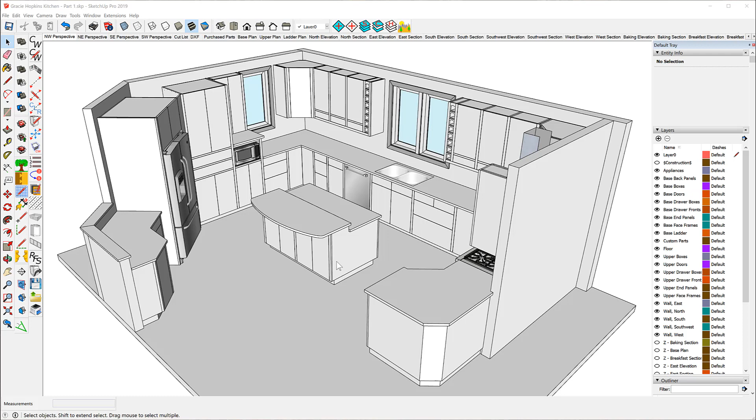Today we're going to begin drawing the model in front of you. We're going to do two things: first, draw the walls, and secondly, draw one 3-box cabinet. That's our total goal for today, and we're going to take it slow. I want to explain the details of how to draw walls and the details of the story stick in particular. Once we have that down, in Part 3 we can move along pretty quickly.

With that in mind, I've taken the time offline to create a layout of the walls. Here it is—this is all of the dimensions for the wall that we will need. Typically what you'll do is go to a client's house, and if it's a kitchen or closet or entertainment center, you're concerned with the inside dimensions of the wall and any obstructions. If it's a kitchen with plumbing obstructions, make sure you note where those are, and we'll include those in the drawing—any windows, doors, or other obstructions.

What we need to do is include the trim in that obstruction. Now, you don't have to actually draw the windows like I've done here—you could put a rectangle and punch it through. Just make sure if you take that shortcut, the rectangle you produce includes the outside edges of the trim.

If you're only doing one room, the thickness of the walls isn't a big issue. But if you're doing more than one room and some of the other rooms are on the other side of the walls, then you want to get the wall thickness correct. So those are details you have to pay attention to. Other than that, what we want is the obstructions and all the dimensions that will allow us to lay out cabinets offline, away from the client's house.

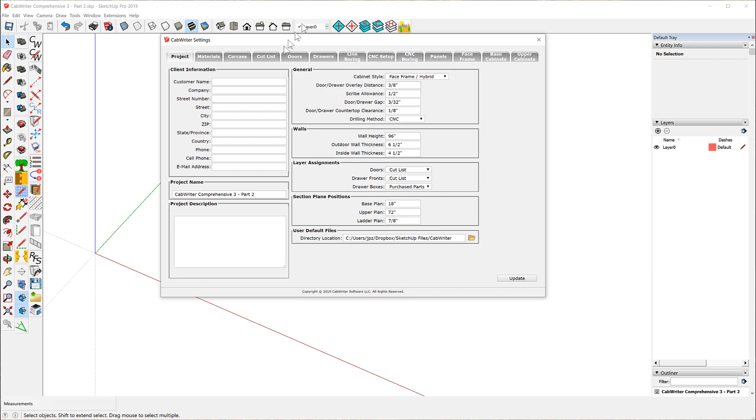So now that it's saved, I need to do the second part to create a CabWriter project, and that's to use this tool right here. I'll use this tool once and only once per project. What it does is immediately open the CabWriter settings dialog box.

Normally what you would do is go through each one of these tabs—there are 13 of them—and make any changes you wanted to reflect the design style you're going to use for your cabinets. You may actually have to do this a number of times in a project, and we will do it a number of times in this project. But to save time, I've actually saved them in files, and I'll show you that.

If I go to Open and Load CabWriter defaults, this dialog box comes up. And if I look at this drop-down menu, you notice there's a bunch of defaults that come with CabWriter for imperial units, and the same styles that come in metric units.

You'll probably see nothing down here when you first install CabWriter, but as you use CabWriter and save defaults, this is where they'll go, and this list will grow, as mine has. These will be defaults you save for various types of cabinet styles you're working on.

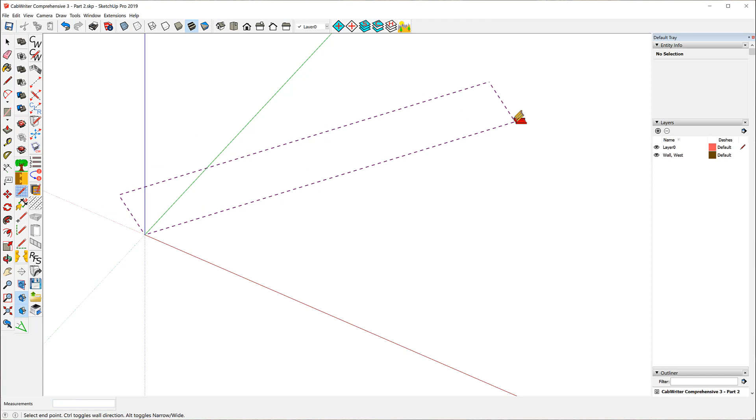All right, the first thing we see is we have a dotted box. That dotted box is telling me that's an illegal wall. It is a hard and fast rule that your entire model in CabWriter must be in this positive, positive, positive quadrant — positive red, positive green, positive blue. If any part of it, no matter how small, is outside of that positive, positive, positive quadrant, you will get this dotted box, which is telling you that's an illegal wall.

So to fix this, I can hit the Control key. Notice as I move this icon and keep tapping the Control key, I switch the side of the line that the wall is drawn on. So now that I've got it in the positive, positive, positive quadrant, it turns green.

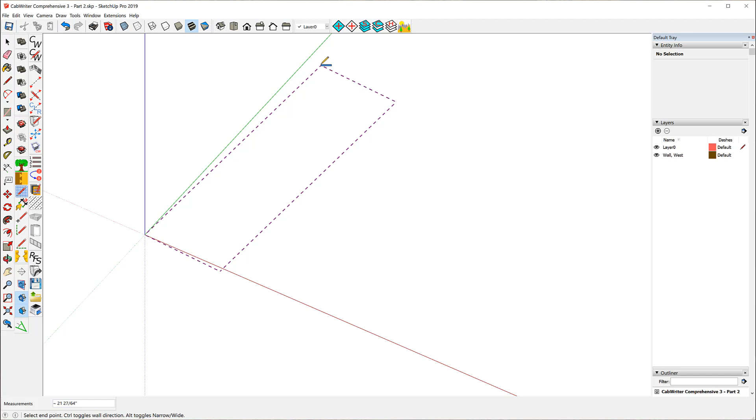Now notice if I start to tip it like this, there's a very small part down there in the lower right corner that is outside of that quadrant, and so the box turns to a dashed box. Same is true here — if I put any part of it outside that area into the negative red area, I'll get a dashed box telling me that's not legal.

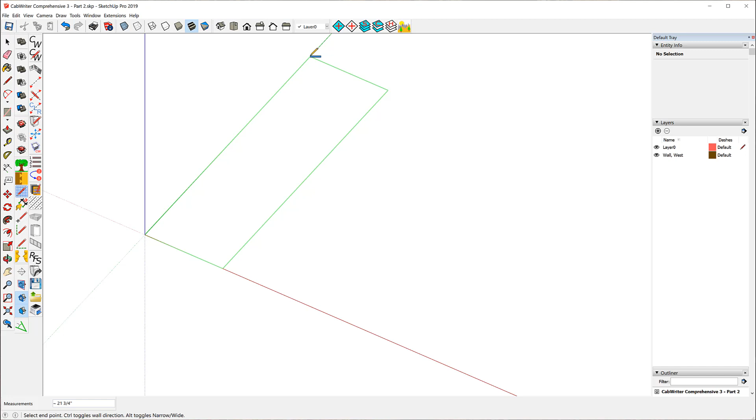All right, so what I want is a wall along the green axis, and I want it to be 192 inches long, which is 16 feet. So I'll type 192. And there's my first wall.

Okay, now remember, I only supplied the name West for that wall. Let's see what happened. Notice it's on a layer called 'Wall, West.' So what happens is we give the wall a name — it could have been a number, could have been 'sink wall,' in which case I'd just call it sink, or 'refrigerator' or something like that.

It will take that name and prepend 'wall space' to it, and that's the layer the wall goes on. The next thing it did is name both the instance and definition name the same, this time prepending it with capital C, capital W, underscore, capital WALL, space — so that's the prefix, CW WALL, and whatever name I gave it. That's the instance and definition name.

Remember that naming nomenclature. The purpose for that, by the way, is so that as I add more walls, all of the wall layers will be together because of the wall space, and when you alphabetize this list, they'll all be together. The purpose of the CW_wall prefix is so that CabWriter can recognize it as a CabWriter component.

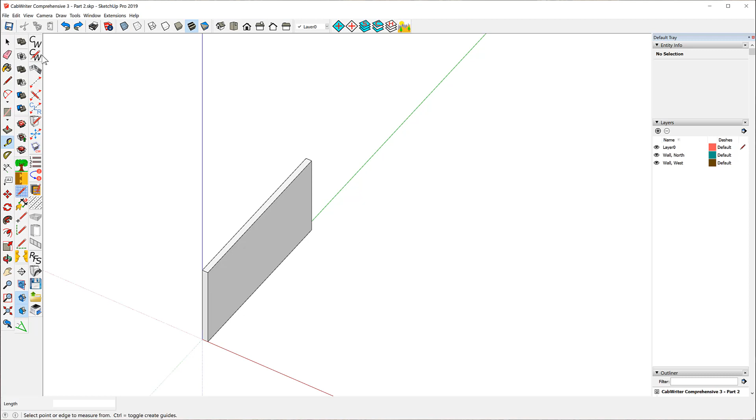96 inches. Those dimensions come from this area on the project tab called the Walls section. The wall height is 96, an outside wall is 6.5, and an inside wall is 4.5. Depending on your construction, you can change these to anything you want.

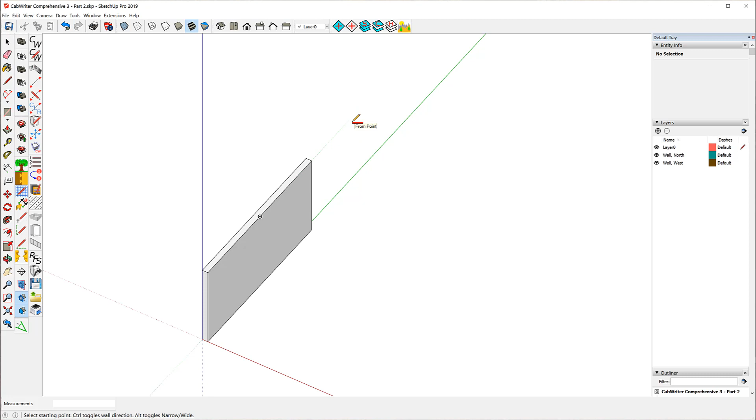But first I have to select the wall tool and click on my first point. Now notice the cursor is a pencil, and in this case it's got a red bar under it. The red bar means hot, meaning an inside wall. But if I tap the Alt key, it changes to blue, which means cold, or outside wall. And that's what I want.

So now I have to find my first point. It's actually going to be in here someplace, and I can't see it, and I'm not lucky enough to click on it. So I could do one of two things. The most difficult is to choose X-ray, find the point, and click on it. The easiest is, instead of clicking on this point, click on this point. It's the same point, only 96 inches up along the blue axis. If I click on that, I'll get the 'provide a wall name' dialog box.

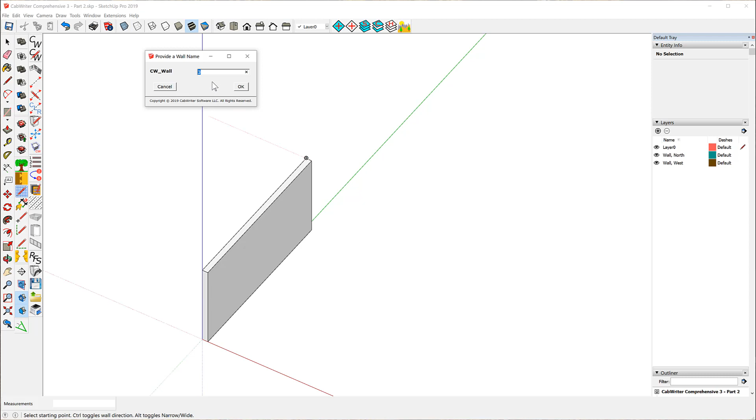I'll name it the north wall and say OK. Now notice as I drag it out parallel to the red axis, I get a wall outlined on the floor, even though I clicked on this point right here. Notice, if I tilt this down, it's no longer red because it's not parallel to the red axis, but it is orange. That's a legal wall right there.

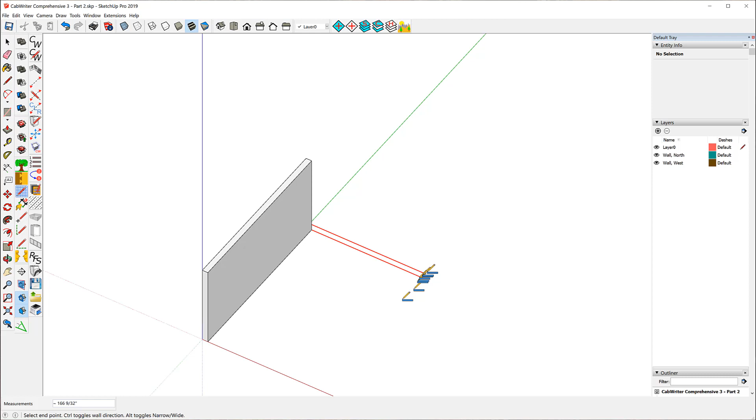As is that. But if I go back a tiny bit, it's not, because that upper left corner would be outside the positive area. So this lets me know I'm on the red axis. I'm going to type 240, enter, and there's my second wall.

Now my third wall is going to be my east wall, and it wants to be 223 inches from the inside of this wall — the inside of the east wall wants to be 223 inches from the inside of the west wall. The easiest way to do that is to temporarily give myself a construction line, 223 inches long. And I hope I did that right. I did.

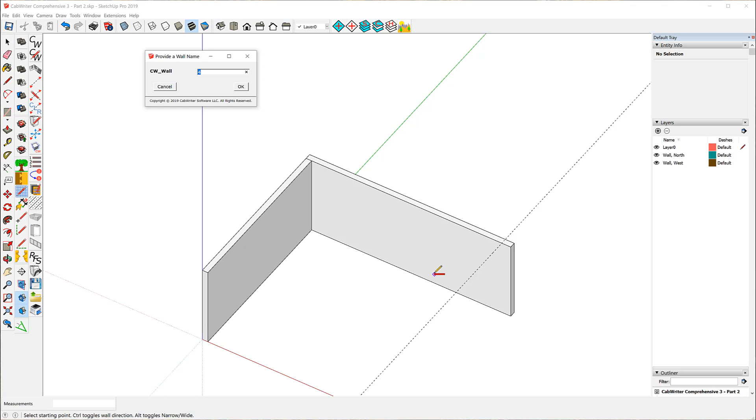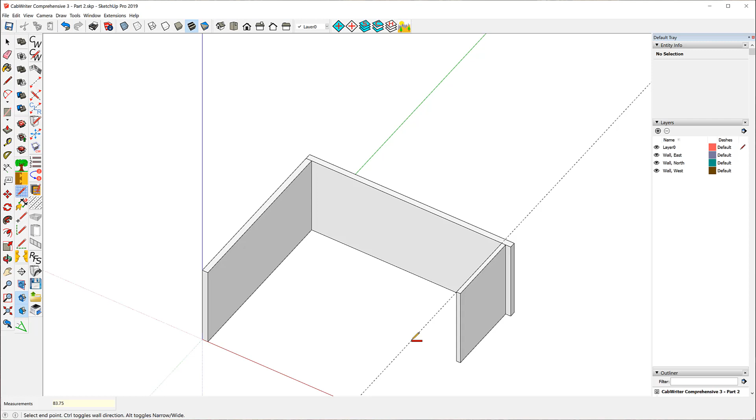This time along the green, and the east wall wants to be 83 3/4 inches. But before I draw the south wall, let me get rid of this construction line. And look over here what I've got now.

I've got 3 of the walls up, and they're called wall east, wall north, wall west. And as I promised, they are all grouped together. Keep your eye on that as we go through this model — that will be very handy.

All right, now the next couple of walls are going to require some construction lines and a little construction work. But let's just start by drawing the south wall. The south wall is going to be an inside wall, and that's what we've got right now. It's going to start at the origin, and it's going to come out 102 3/8 inches. So I'll start here, and that's going to be the south wall.

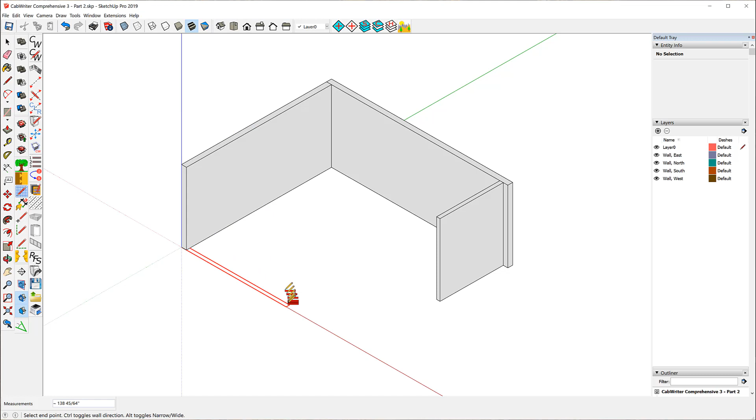And it'll come out 102 3/8 inches. Now I'm not too worried that it's overlapping because this is going to get cut off. You'll see that in a moment.

I'm going to create another construction line, actually a construction point, and it's going to start from this point and go along the red axis in this direction, 36 inches. And that's going to be an intersection point for the southwest wall.

And the southwest wall is going to be built at a 45-degree angle, so I'm going to add that. I'll hold the shift key down to lock in my protractor tool. I'll come out here and then around 45.

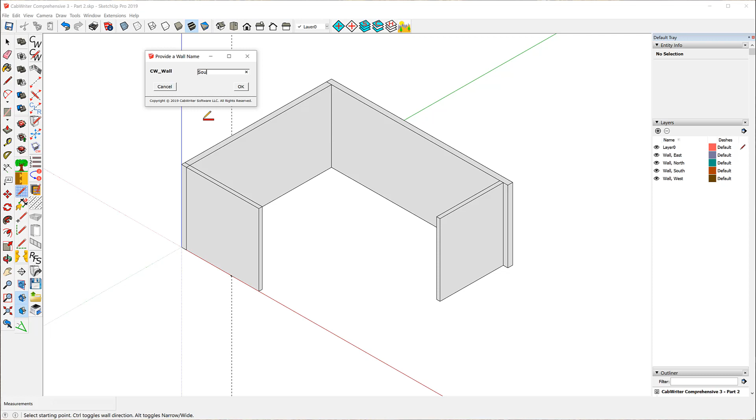And now I'm going to use the wall tool again. This time it's also going to be an inside wall, and I'm going to start here. And this is going to be southwest. It's going to be my southwest wall. And it's going to also intersect here.

I can come out along this line. Any place on that construction line is fine. Notice that that is an illegal wall. Now, CabWriter doesn't stop you from drawing illegal walls, it just lets you know that you are doing so. So I can click here, and I have this very long wall, but not to worry. I'm going to fix that.

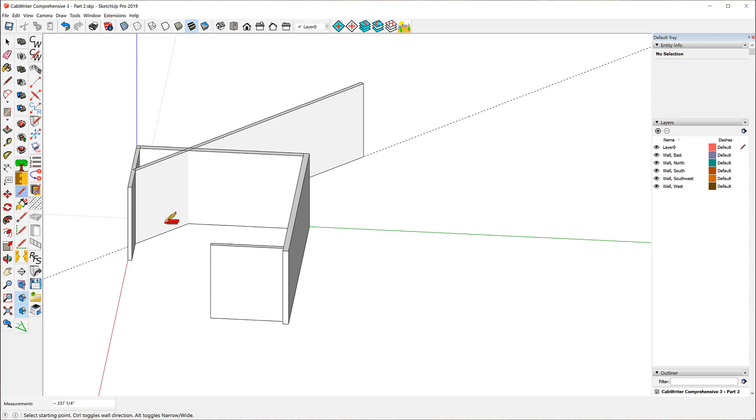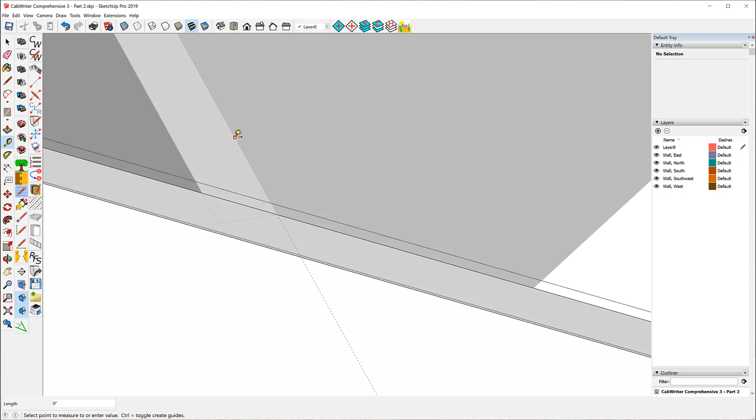So what I want to do is choose this wall, edit component, and create for myself a construction line parallel to that wall. And now I'll draw a line from that intersection to that intersection. And with the push-pull tool, I'll get rid of this part of the wall.

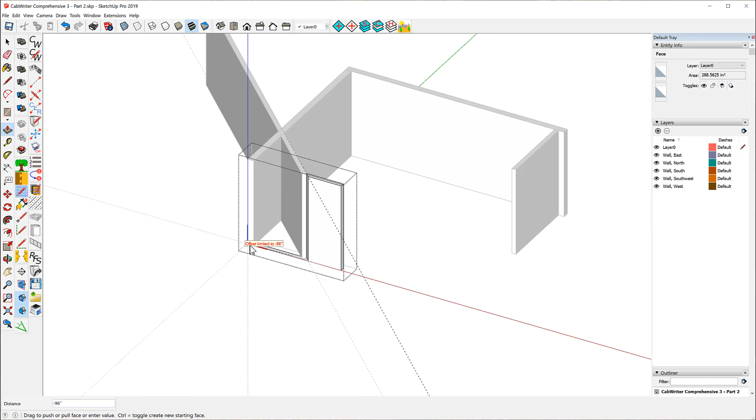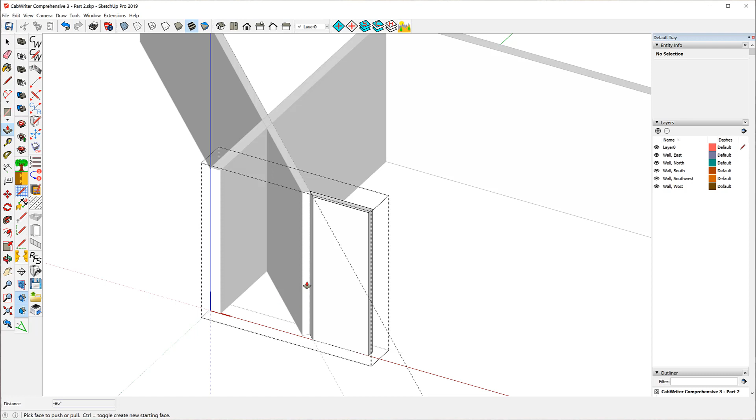Now notice right away that my axis for this part is over here by the origin. I want to move it over here. So the way I'll do that is, first of all, get rid of this construction line that I created, then leave Edit Component mode.

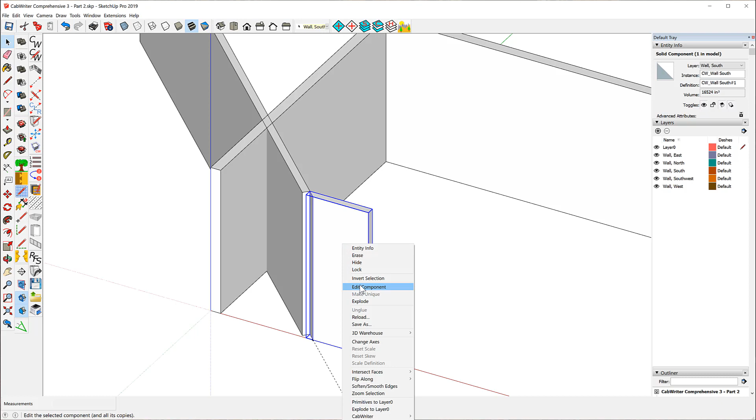Choose this wall and say Change Axes. And I'll click on that point, come out along the red, then I'll go back along the green. And there we go, now I've got the correct bounding box. And if I go to Edit Component, notice my axis is here, not over here. All right, so that one's fixed up.

Now the other thing I want to do is fix this one. Notice already it's got a really bad bounding box, but I'll fix that in a while. Let's edit this component. And if I'm not mistaken, well, let's do this.

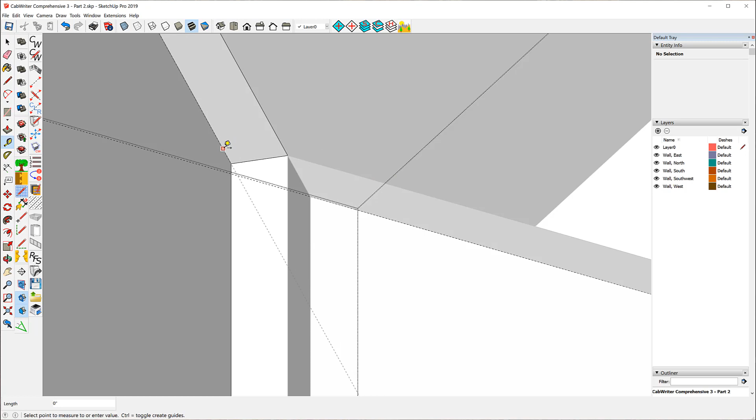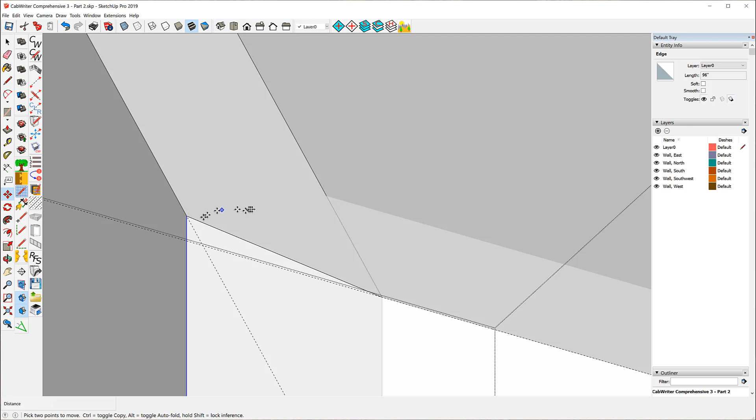So what I want to do is take this line on this part, oh, I guess I have it. I've got it selected. I'm going to move it from here to here. And I'm going to take this line and move it from here to here.

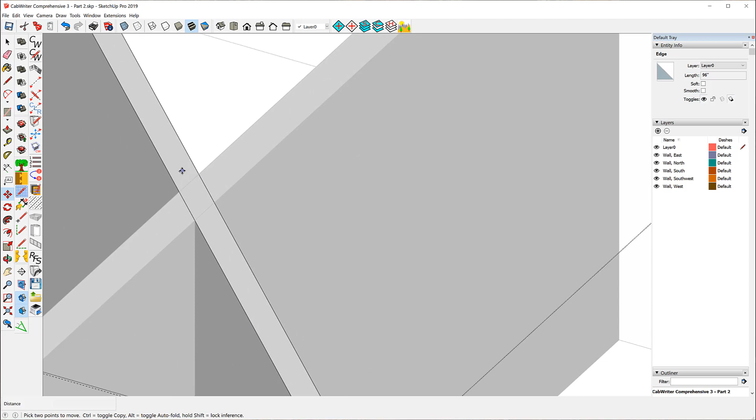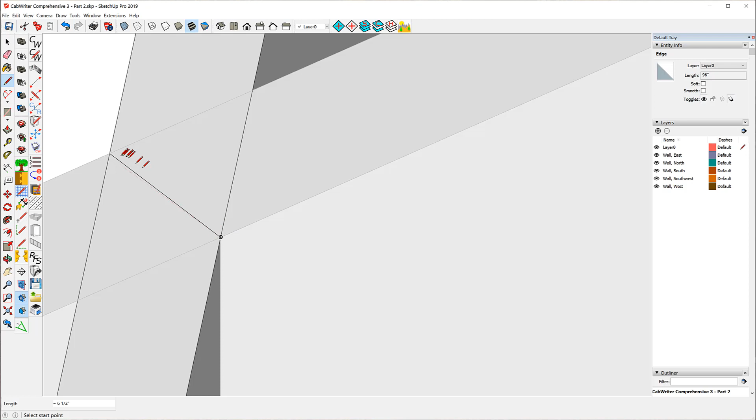And while I'm at it, I'm going to draw a line from here to here. Now, by the way, that line is at an angle, it's not parallel to the red axis. Notice, well, it's not going to let me. Oh, there we go. Notice that's parallel to the red axis, but that's not where they intersect.

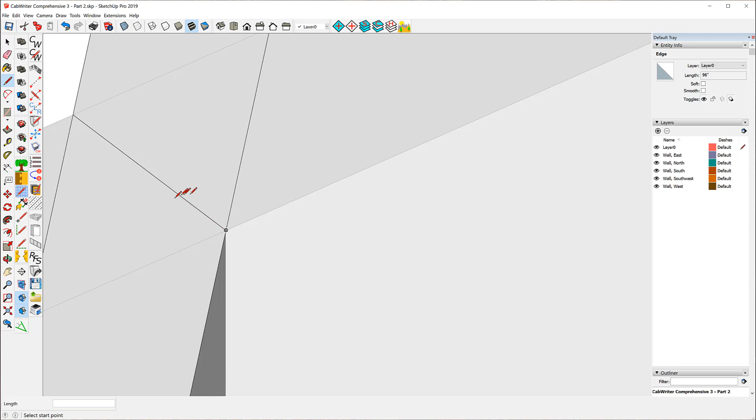They intersect there, not there. So that's not exactly parallel to the red axis, which means that's not a 90-degree angle here. But we'll leave that up to the carpenters to figure out.

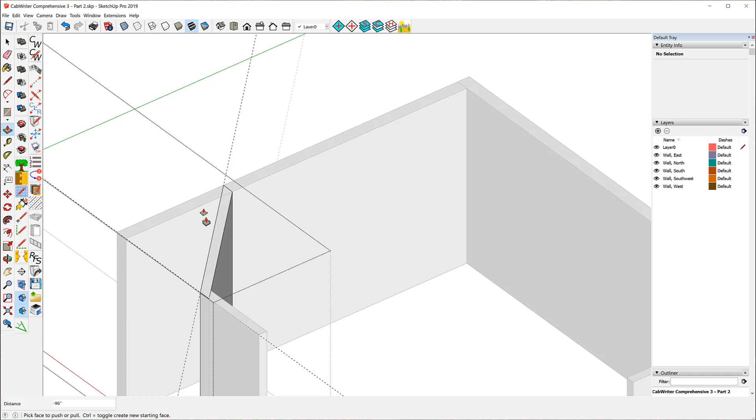Now what I can do, and by the way, the reason that's not at 90 degrees is because this is a 6.5-inch wall and this is a 4.5-inch wall, and that gives me a strange angle here. But that's okay. All right, now I've got to bring the axis in, and I've also got to correct for the bounding box. So let me do that in one fell swoop.

Let me get rid of my construction lines. Since I created those while I was in Edit Component mode, I've got to delete them before I leave Edit Component mode.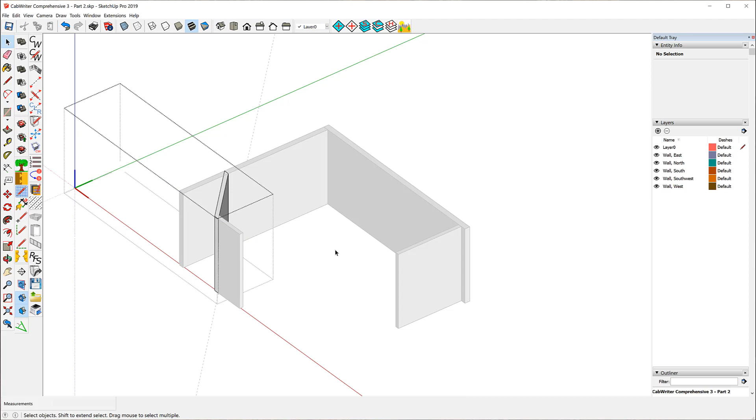I'm going to change axis. And what I typically do is I take the longest dimension and make that the red, and then make the other dimension. Whoops, what did we do wrong here? Let me undo that. Let's do that again.

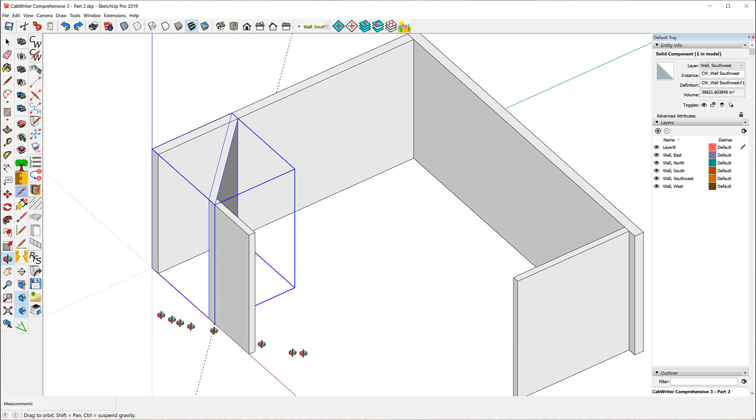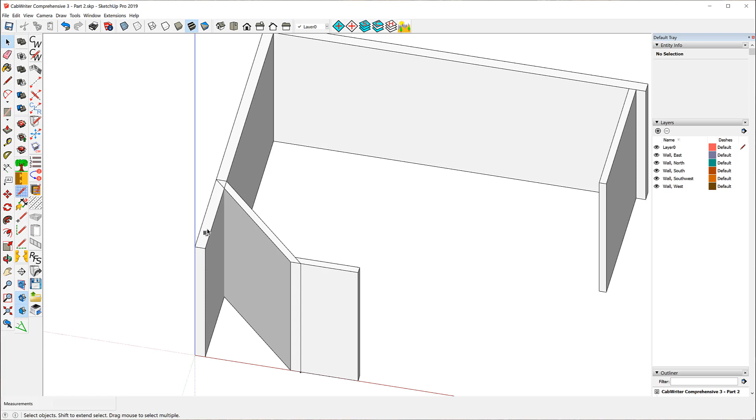That's better. All right, now one last thing we have to do is fix up this wall, and I'll get rid of this construction line. I'm going to do that by recreating this line again here, and again notice it's not along the red axis, it's down here a ways.

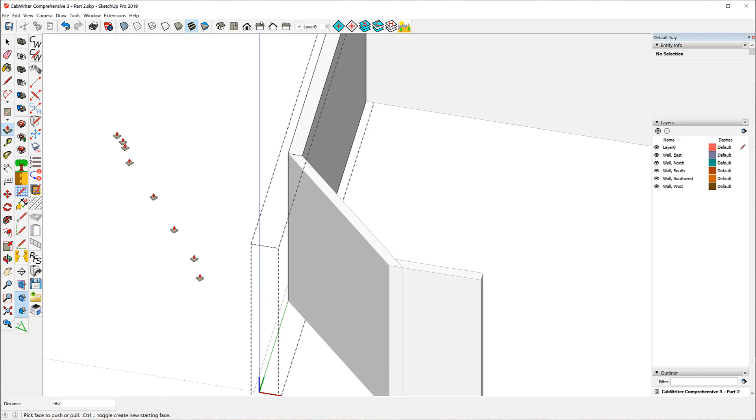And again, I got to fix up the axis. This one will be fairly easy. And there we go. All right, now I have my walls. I don't have my construction or my obstructions. What I'm going to do is bring in one window here and show you how I would do that.

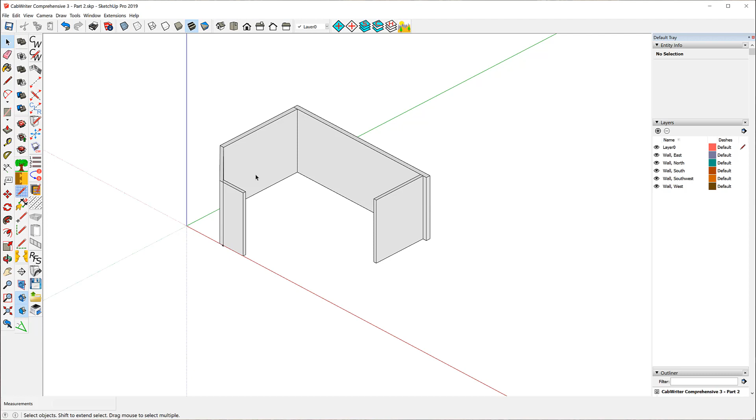I'm going to let you do the rest. So let me bring in the wall layout so we can see what we're trying to do.

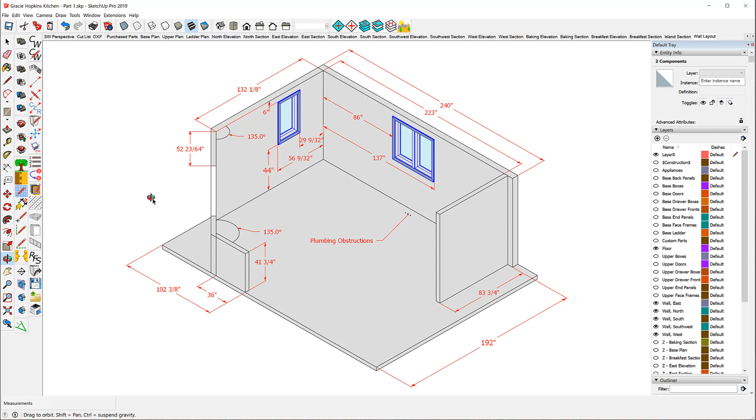Okay, now since I am drawing exactly the same model that I've already drawn here, what I can do is just simply select these two windows. And I will edit using the edit menu, not right click, copy, or Control C, but I'm going to use the edit menu and say copy. And also, by the way, notice in this image that these have to be cut down here to 41 3/4 inches, so I'll do that in a moment.

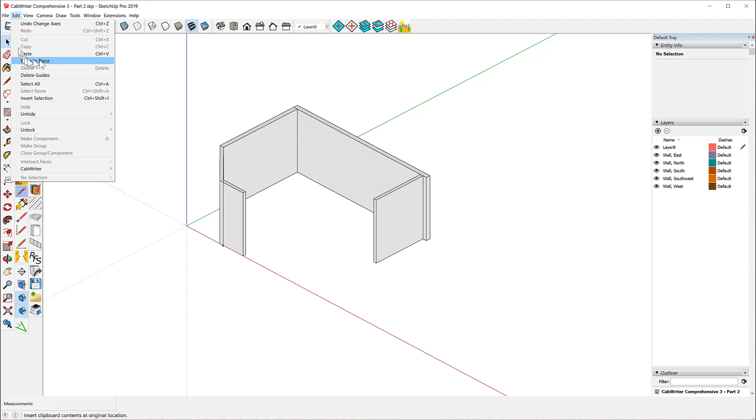All right, so I've copied these. I can simply go to my other model now and go to Edit, Paste in Place. Notice that the windows were put in here in exactly the same place because I used the Paste in Place as they were in the other model. And if I've drawn this model correctly, they'll be in the same place, which we'll check in a moment.

One of the things I have to do is cut these walls down, so let me do that. All right, so what I'm going to do is make a mark that's 41 3/4 up from the floor, up along the blue axis.

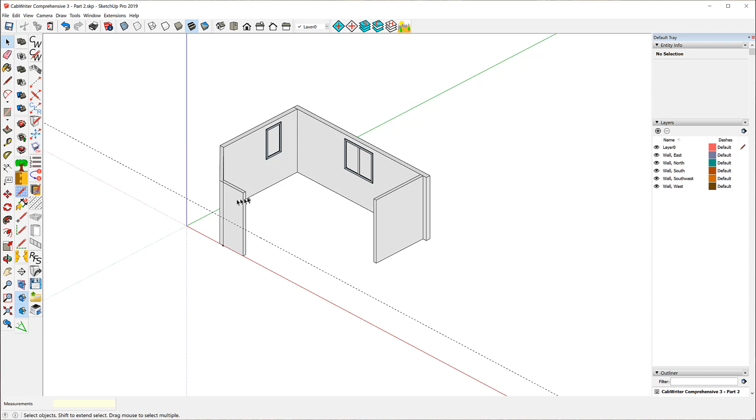And now I'm going to edit this wall. And with the push-pull tool, I'll bring it down to 41 3/4. Now I can get rid of that construction line.

Now, in order to bring this one down, what I've got to do is figure out where I want to bring it down. So I have a dimension that I got to come out 52 23/64. This is kind of a weird dimension, but it's a consequence of these two walls being different thicknesses. But I'll come out here 52 23/64, right there.

And so let me edit this wall. There's the guide point. There's the end, and that's 90. So I'll draw a line like this.

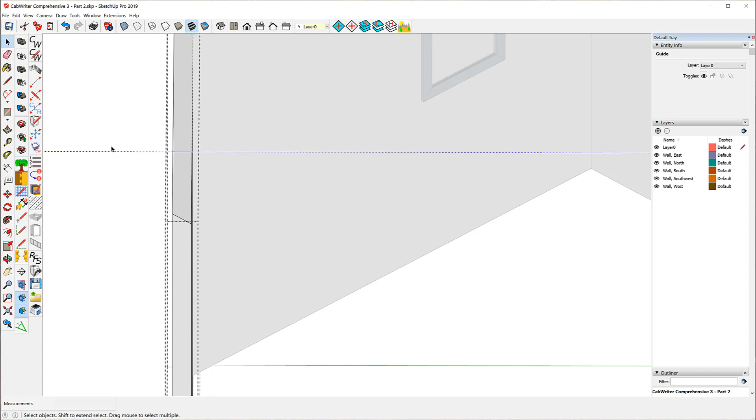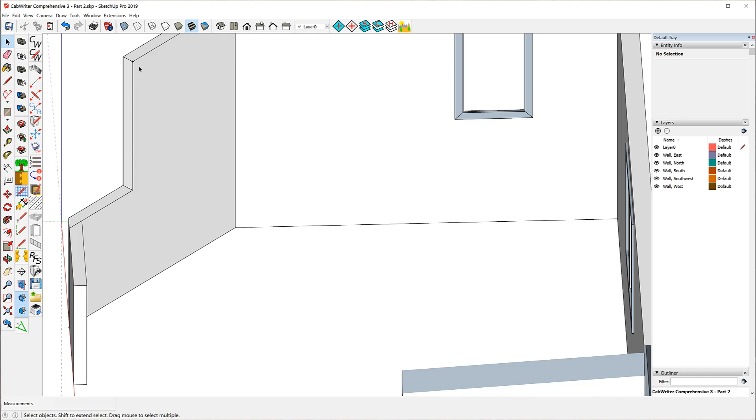I'm going to get rid of my construction line. And there we go, now I've got what I want. Let me get rid of this while I'm at it. Well, it doesn't want to. There we go. And while I'm at it, I've got one over here too to get rid of.

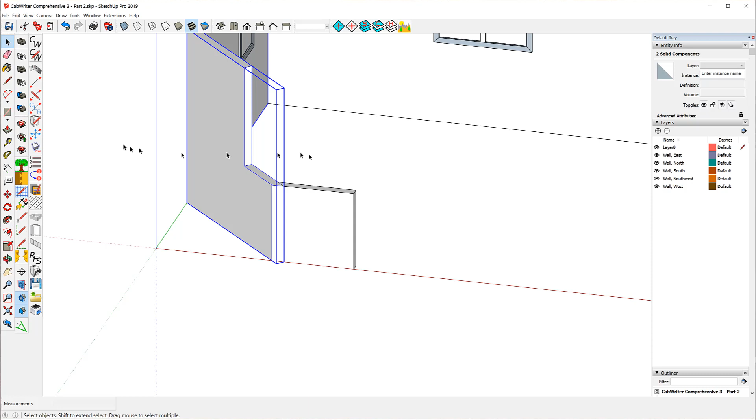All right, so I've got that done. And that all looks correct.

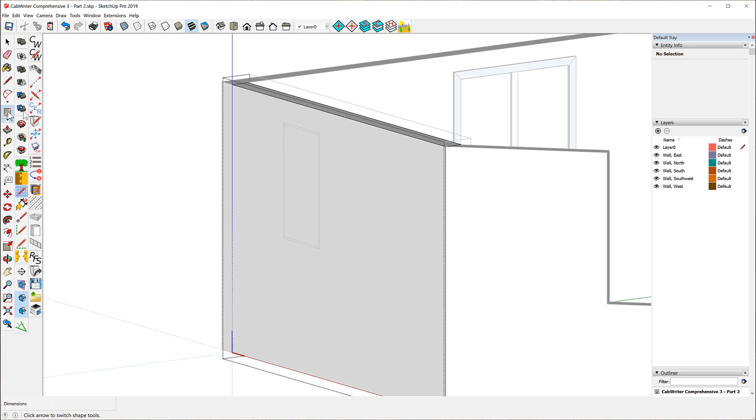Now what I can do to fix up these windows is I can go around back here. Select this, edit, and I can use the rectangle tool. Start there, come through there. Push this all the way through the other side. There we go, now I have my window.

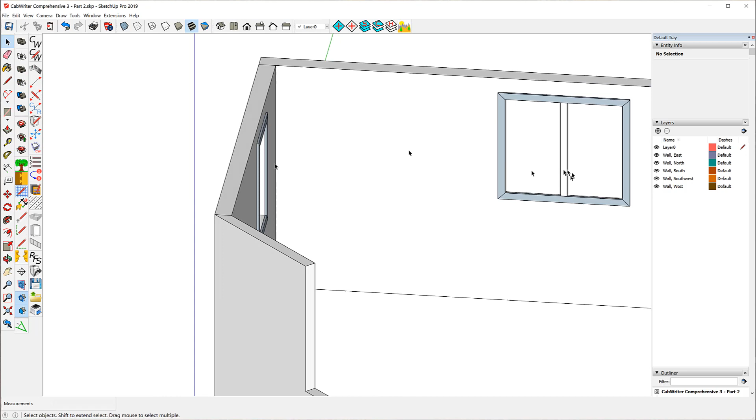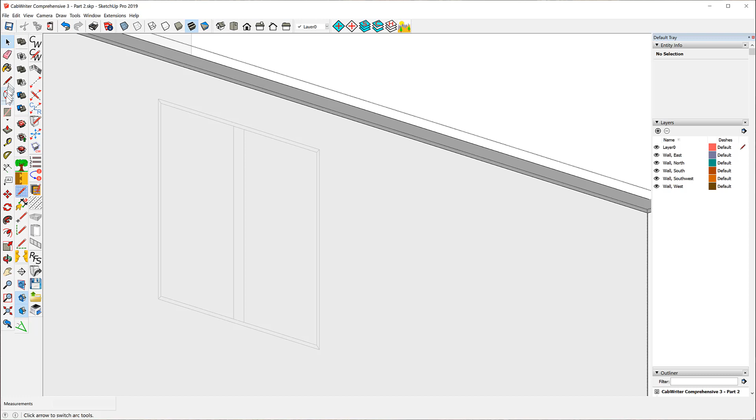I'll do the same thing to this other one. Whoops, I wasn't in edit component mode. And there we go, now I have my walls.

And at this point, I'm ready to do my first cabinet. Now, I don't have a floor here. I can add that anytime. I'll add it right now.

What I'm going to do, I'm going to start at the origin, go to this back corner. I'm going to pull this down a couple of inches. Make sure you pull it down and not up, I'll just say 2 inches. And just for the heck of it, I'll pull this end piece out a little. That's not what I wanted.

Doesn't matter how far. And there we go, now I got to make that a component, and I'll just call it floor. And I'll give it the same instance name as the component name.

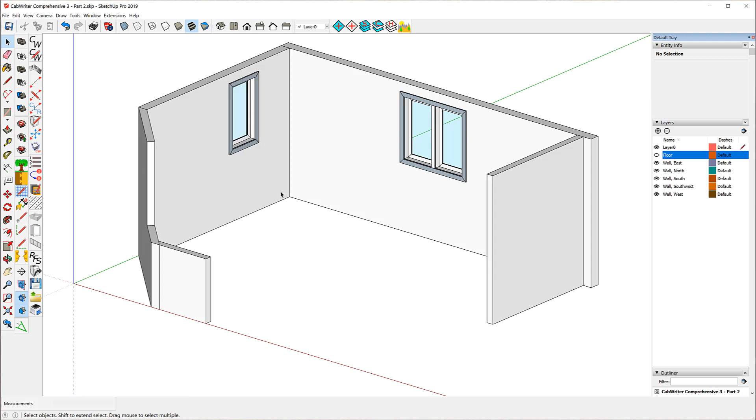Okay, so now my next part is to draw the cabinet I want to draw. And the way I start out is with construction lines. You must have construction lines for drawing cabinets, or at least construction points, but I like to draw construction lines.

The first one I'm going to draw starts at the base of this wall, coming out along the red axis 24 inches, which is the depth of my base cabinets. I'll do the same here, 24 inches, this time along the green axis. This is where my cabinets come together in the corner. I could draw construction lines on this wall and this wall too, but that would clutter things up at the moment, so let me just stick with this for now.

So the next thing I want to do is use the story stick tool to draw my cabinet. As I said, this is going to be a 3-box cabinet. Here in the corner is going to be a Lazy Susan. Next to it is going to be a 3-drawer bank. Next to that is going to be a standard base with a drawer, and then there's going to be an opening for a dishwasher. The total length of my cabinet is 45 inches.

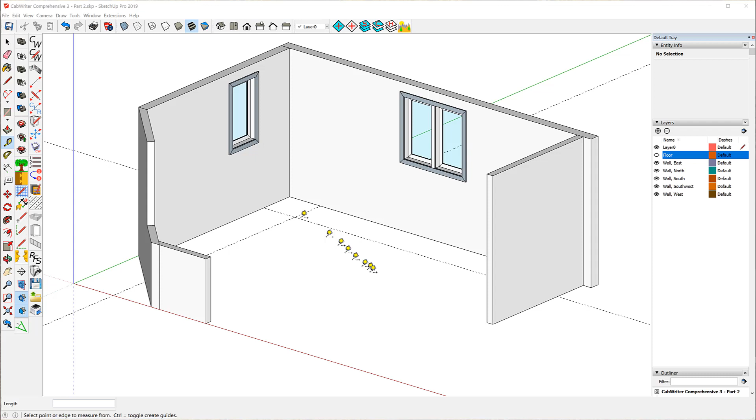I have to use the story stick to lay out where the cabinet begins. I'll start it here, and where it ends, over here someplace. Once I've done that, I can use the story stick to define the openings. There'll be 2 openings, and between them will be a connector stile, so there'll be a connector stile here and here.

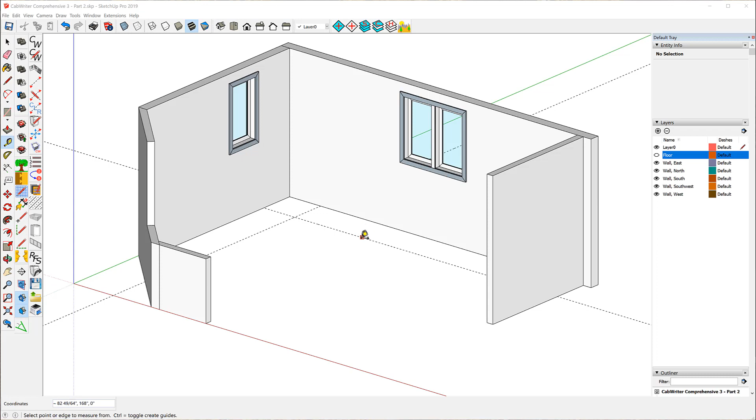You'll see this as I go along. Only the first 2 markers—that's what they're called, markers—the one on this end and the one down here, 45 inches, will require my defining what those stiles are. Every other stile in a cabinet will be a connector stile, so I don't have to tell CabWriter that they're going to be a connector stile.

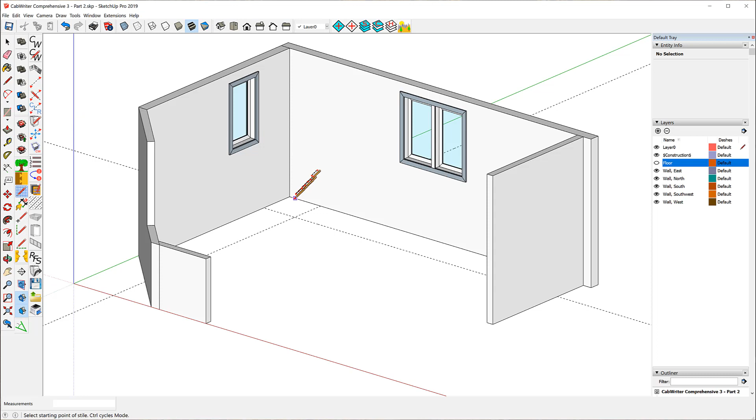So let's see what happens. I choose the story stick tool, create story stick, and I'll start here. I'll come out any distance as long as it's on the line—doesn't matter how far, as long as it stays on the line. And I click. That brings up the end selector.

The end selector will allow me to choose the type of stile or treatment. If these are frameless cabinets and I'm not drawing stiles, I'm really defining the type of treatment at the end of the cabinet. This is going to be a Lazy Susan, and a Lazy Susan goes around the corner, 90 degrees around the corner. So what I need here is a left pivot, and I'll make it a left pivot connector because I'll want to put other cabinets over here that connect to it.

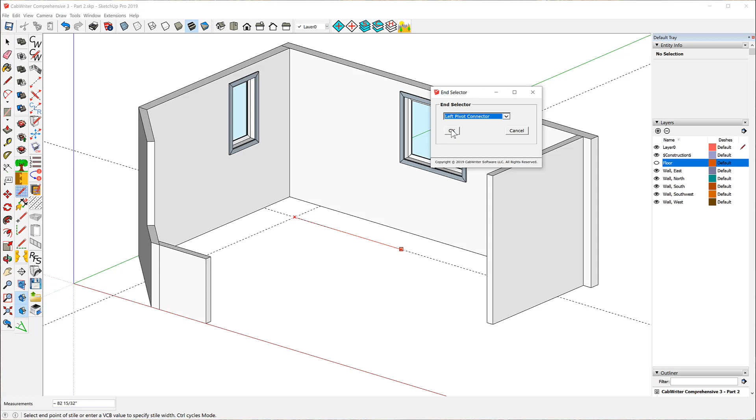So I'll make it a left pivot connector and say OK. Now, since it knows the width of a left pivot connector, as soon as I hit OK, it bounces back to the dimension required. Now I want to put another marker out here, 45 inches away—and by the way, 45 inches is the total length of the cabinet. So I can do that one of two ways.

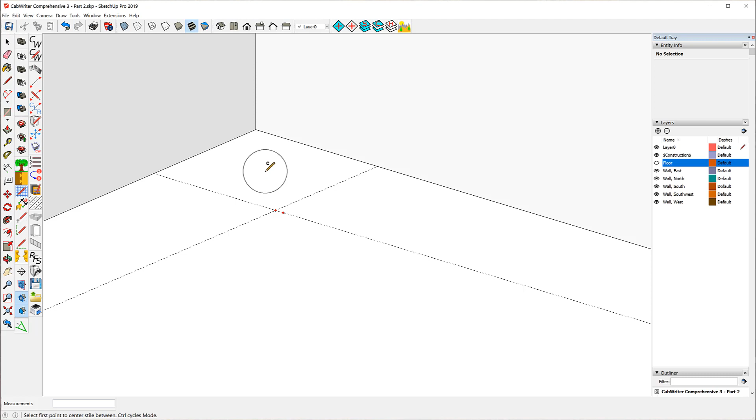I can use the tape measure tool, or stick with the story stick tool and push the control key twice. Watch what happens to the cursor: once, I get a C, that's the centering tool; twice, I get a D, that's the distance tool. So I click on this point with the distance tool, come out any distance, don't click this time, just come out, type 45 for 45 inches, enter. Notice it came back to here, which is 45 inches from this point—you can see that in the VCB in the corner.

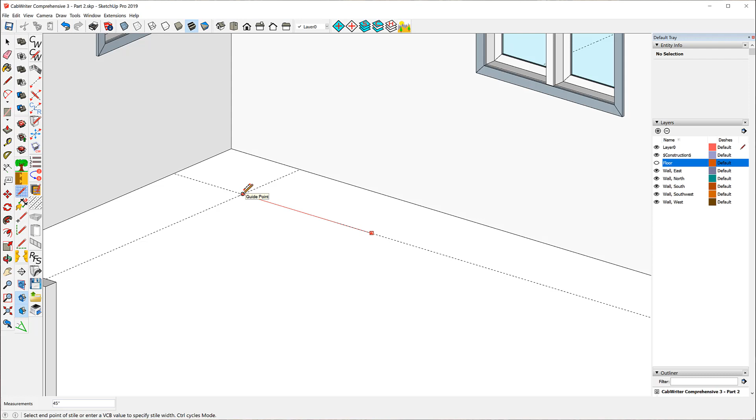Okay, but now what I want to do is just click any distance inside. It has to be inside, not out here, because this defines the outside of the cabinet on this end, and this one defines the outside of the cabinet on the other end. So obviously I have to come in here, any distance, and click.

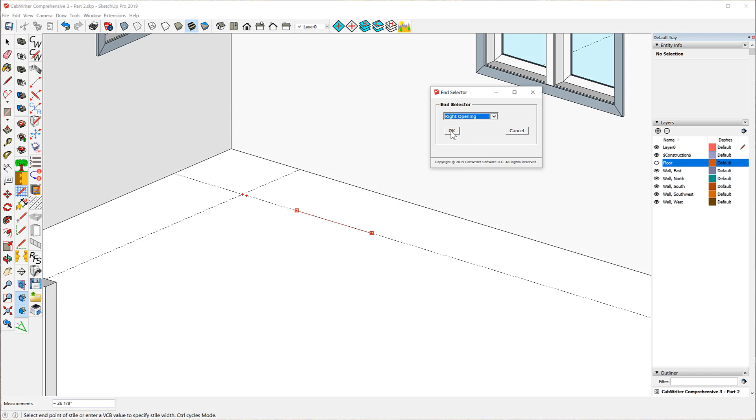And now I'll choose what I want out here. Notice all I can choose from are right connectors at this point, and I'm going to choose a right opening. Remember I said I was going to have an opening for a dishwasher, so I'll choose a right opening. CabWriter knows the width, so as soon as I say OK, it pops back to the correct width.

All right, so now I want a 3-box cabinet. This box here is going to have a 15-inch opening. So I'm going to use the distance tool again by clicking twice on the control key.

I'll start here because this is an opening now. I'll come out here, don't click, and I'll just type 15, enter, and it'll move that point to 15. Now since this is the opening going from here to here, I have to click on this side of the line. And notice when I click, I'm way out here.

As soon as I click, it pops into the correct distance because it knows the distance. It knows the size of connector stiles. So now I click again twice. This one's going to have an opening of 13 inches. So I come out here on the line, don't click, type 13, enter. And since this is the opening, I click on this side of the line.

Now this opening is going to be whatever's left. Now we can measure it. It's 11 inches.

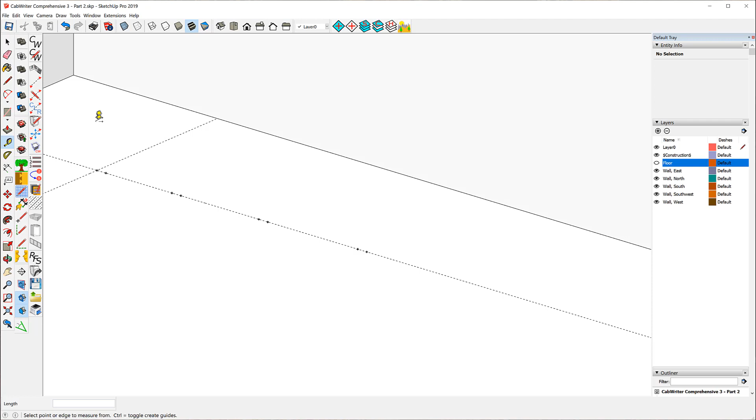Okay, now going back to the story stick tool until I get my markers, my red markers. So now I've defined the length of the cabinet from this point to this point. How I'm going to treat the cabinet at this end - this is going to be a connector stile. And how I'm going to treat the cabinet at this end - this is going to be an opening stile. And these are just connector stiles connecting the boxes. At this point, I hit the end key, E-N-D.

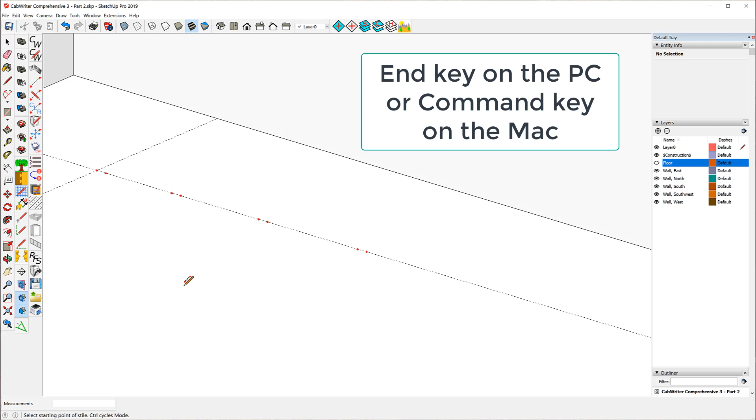And that brings up the box selector. Notice the box selector makes these markers blue. That's because the very first marker I laid down was this one. The second one was this one. So I'm drawing this cabinet from left to right. Therefore, box 1 is here.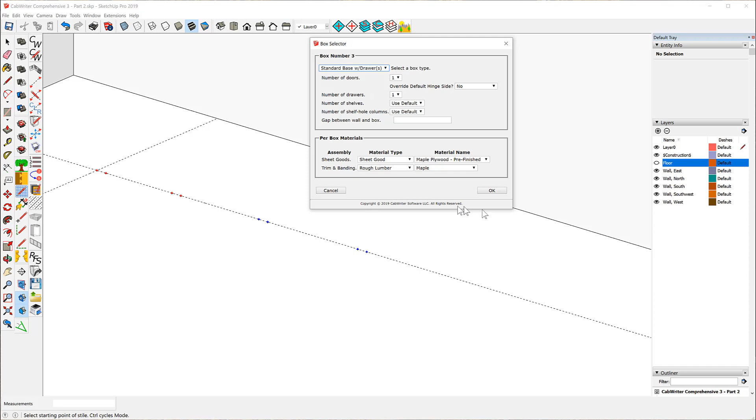And I want to make that a Lazy Susan, with one door. All right, this one I want to be a 3-drawer bank or a drawer bank base with 3 drawers. And this one I want to be a standard base with drawer - 1 drawer, and 1 door. I click OK.

I'm patient. I'm waiting for the cabinet. And there it is.

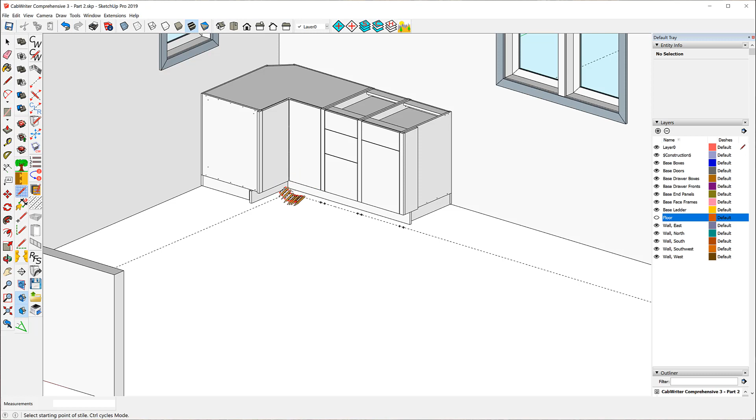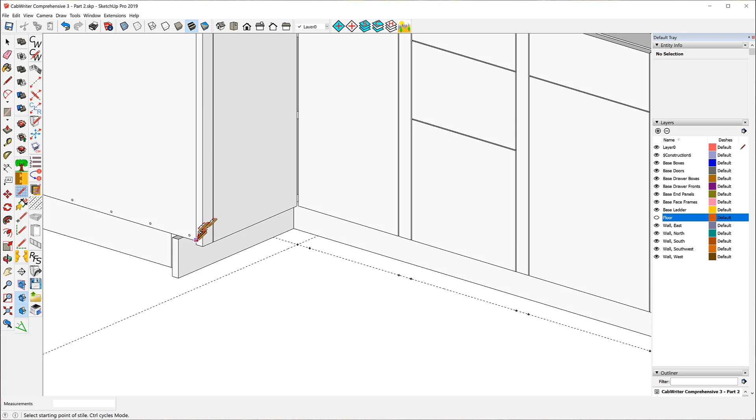Now, one of the things I want to explain, this stile, if you remember, was a left pivot connector. Now, what does that mean? Well, it means I defined what the stile is here. But that stile actually pivots counterclockwise 90 degrees and then moves itself over here. All right, I'll say that again. It pivots itself from this position 90 degrees, so it'll be from here to here, and then it slides itself down here to line up here. So it is this stile that I've defined here. And CabWriter knows to pivot it and slide it down here to put it in this position.

So that's what pivot means. So anytime you have a pivot connector, you'll need pivot connectors for Lazy Susans and diagonal corner cabs. But other than that, this is what we did.

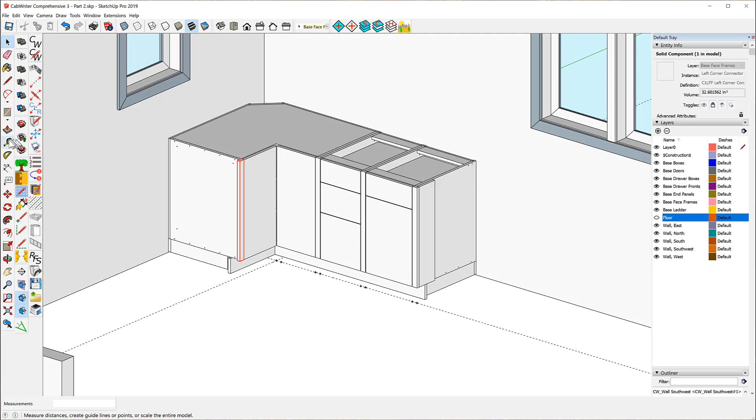Now we can take some measurements just to make sure it did everything correctly. This opening, from here to here, should be 15 inches, and it is. This one should be 13 inches, and it is.

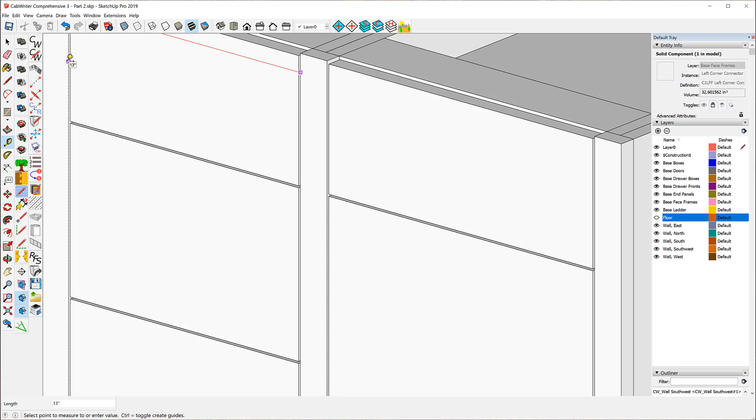And this one I would have to create a line where these two come together and measure it, and it'll be 11 inches, trust me. Okay, actually, you don't have to trust me. Let's see.

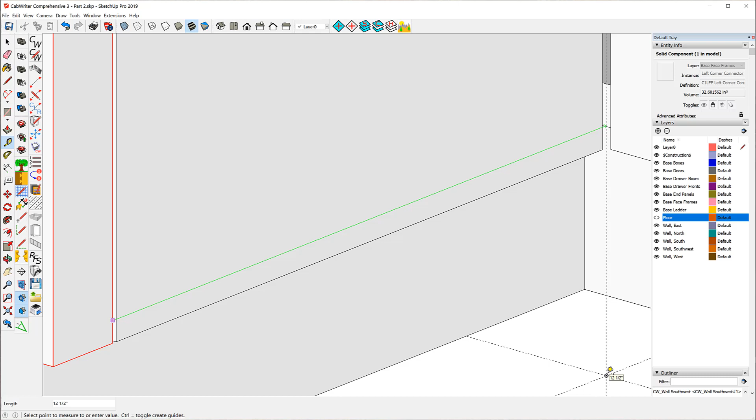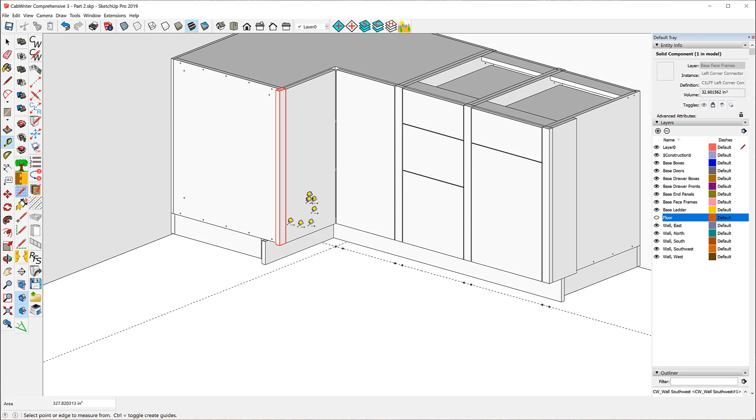Oh, I'm sorry, it'll be 11 inches plus an inch and a half. Because this moved out to this position, and this is an inch and a half wide. An inch and a half. So it'll be 11, this opening distance here, plus an inch and a half. And that's what it is. It's 12 and a half inches.

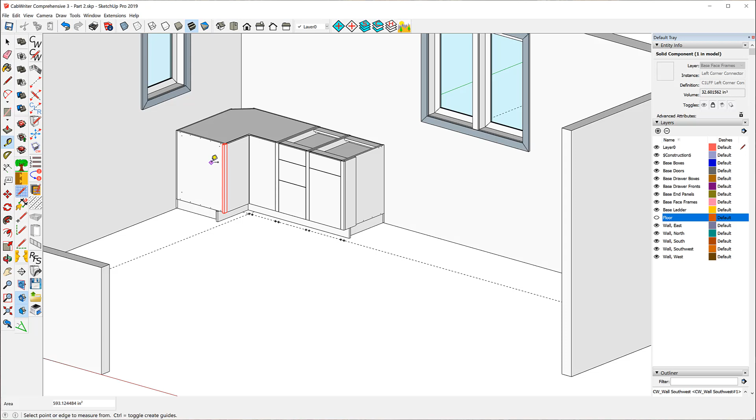Okay, so that's our first cabinet. Now, this took a lot of time because we had explained all the walls and all of the story stick details and what have you. In part 3, we're going to speed things up quite a bit. We've got the basics done now. Offline, I'll put in the plumbing construction or plumbing obstructions right here, and a few other little details, but I'll come back and we'll be ready to start with the next cabinets in part 3, and we're going to speed up quite a bit. We're going to start drawing multiple cabinets per video. So until part 3, have a good day.